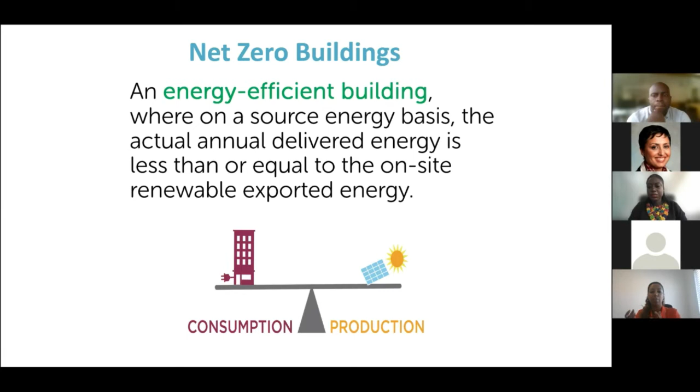So we talk about net zero, but what exactly is a net zero building? A net zero building is an energy efficient building where, on a source energy basis, the actual annual delivered energy is less than or equal to the on-site renewable exported energy. Basically, whatever you're consuming and whatever you're producing, it's a balance. But how do we go about achieving this?

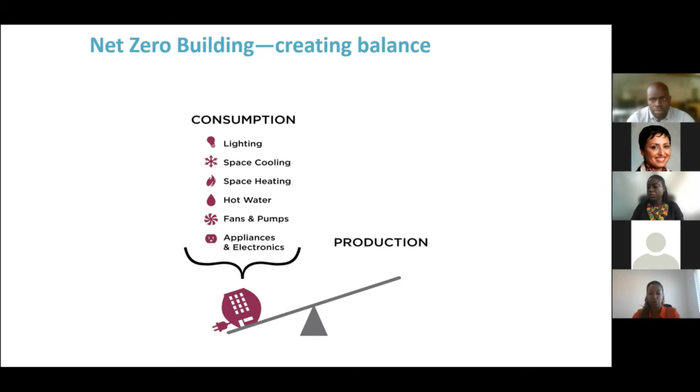Let's talk about consumption first. Any building, whether in the US, Ghana, Africa, or throughout the world, has lighting, cooling and heating needs, hot water, fans, pumps, different appliances, phone charging, computers - a bunch of appliances that go into our household. That's all part of our consumption. Then we need to balance what we're consuming by adding on any renewable energy to our production in terms of utility.

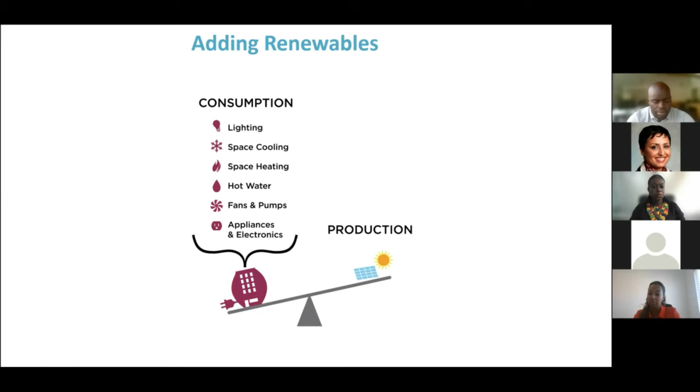So a building on a diet, think about our own bodies and a diet as well. That is what you're consuming and what you're producing is balanced. Keep in mind, this is on an annual basis. For example, your production could be higher at summertime and much lower in wintertime.

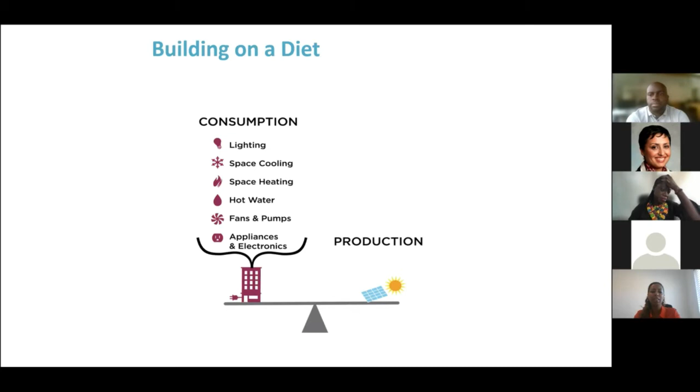To achieve this, the first thing you have to do is energy efficiency. You have to have an energy efficient building and energy efficient systems, consistent operation and maintenance, and then change in user behavior also comes into the consumption part of getting to zero. To achieve this, we have to have at least about 50 to 70% reduction from standard buildings that exist today, without the net zero concept behind it.

Secondly is when you apply on-site renewable energy. In most cases within the US, this has mostly been solar. This concept can be enlarged through a country or a region, but right now we're focusing on buildings, so it's whatever you're producing on your building in comparison to what you're consuming. That is the definition of what a net zero building is.

I mentioned earlier that my focus when I worked with the Department of Energy was specifically zero energy, and the US has a zero energy mission. That mission is to accelerate the development of zero energy commercial buildings, specifically the space I was working on, but we also have retail, office buildings, residential as well, and to make sure that as a federal government we are providing the technical assistance and the operations, construction, design, all of those to be able to deliver a zero energy building.

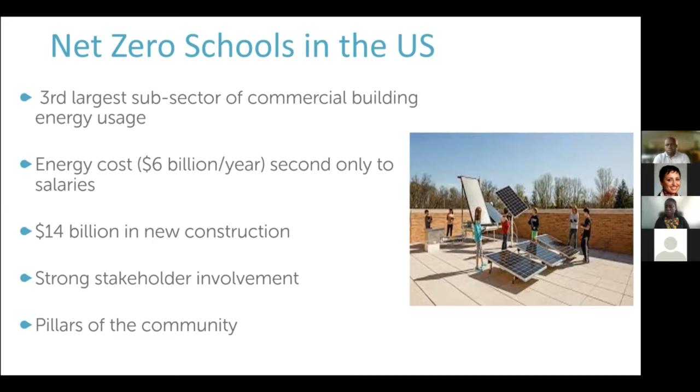This was about 8 or 9 years ago. So what were the challenges back then? Of course, these challenges still exist—you don't change the market in a few years. So we decided to first identify what our barriers are and then what the strategies are.

The first one is lack of reliable information on how much it costs to build these buildings, or lack of technical knowledge. Net zero investments are perceived to be too expensive. That's always been the case.

A school board, when they meet together to decide to build a new school, do they even know what net zero means? If you're not actively involved in the energy industry, these are not terms you're familiar with. So there's a lack of education in that space, and then a lack of integration between designers and school administrators. School administrators make decisions in a silo outside of these designers. Yes, designers might know about net zero, but there's still that lack of education, and we need to bridge the gap with school administrators.

So a few of the strategies we came up with: the first one is providing access to the feasibility study. The US, with the help of the National Renewable Energy Laboratory, NREL, did a feasibility study, and we found that cost to cost, you're able to build a net zero school building whether you live in the coldest part of the country or the warmest part. This highly technical study is available — anyone can Google it — but we are also placing it as a resource for our schools, along with technical design and strategies.

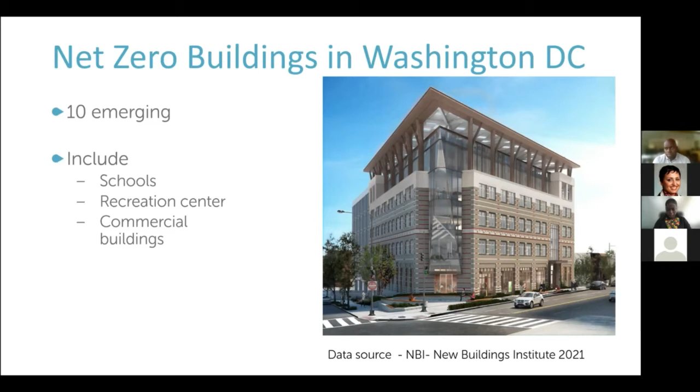So again, while big strides are being made to improve net zero buildings and increase their numbers, there are still a lot of challenges — including the fear that net zero buildings will be too expensive.

Again, this is always a concept, even though there are case studies where the cost has not been significantly higher. That is still a myth that's out there. Risk of new technologies, cost, time, underperformance.

There is this idea that maybe they're not giving us enough windows, or maybe too many windows, so now it's too hot in there. But no, these buildings are designed with health and safety of the occupants in mind, and in fact operate exceptionally better than standard buildings.

Risk that buildings do not perform as designed. Fear that occupants will be less satisfied. Again, folks thinking that they're not getting enough AC or enough heating just to be able to save energy.

That in fact is not the case, because there are technological advances that have been made so you're able to get enough of either your heating or cooling needs without having to consume as much energy. And workforce is a big deal—making sure our building operators know exactly how to operate them, and this needs to go hand in hand with the technology advancement.

So while those barriers exist in the US, there are even greater barriers for Africa. So now I'm bringing it back to buildings in Africa. The focus, to be quite frank, for Africa is power generation.

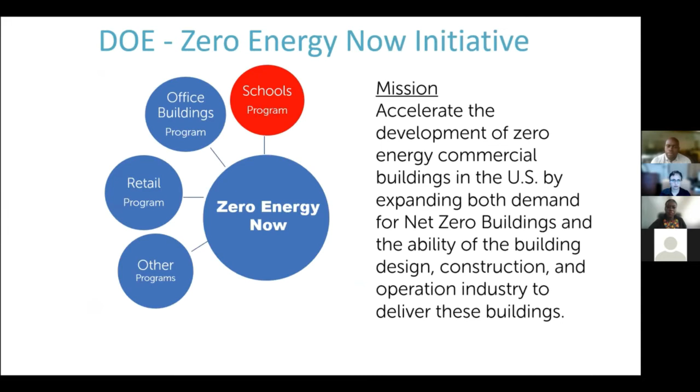Great, thank you for that, Salome. I think there was quite a striking stat there that you had of 50 to 70% reduction in energy. Is that something that is being achieved within that net zero program? Because I think what's important for us today is to understand what is being achieved.

Yeah, well, so if the targets are 50 to 70%, you basically have to reduce your energy use intensity, EUI, per square footage to make sure that you get to this figure, basically to the 50 to 70%.

Yeah, and I think that's something for all of us to keep in mind, because we're trying to figure out whether or not this is possible, and the efficiency-first approach where we have to reduce significantly - this is 50 to 70% reduction on a performance that was already probably a bit more efficient due to the energy code that is in there.

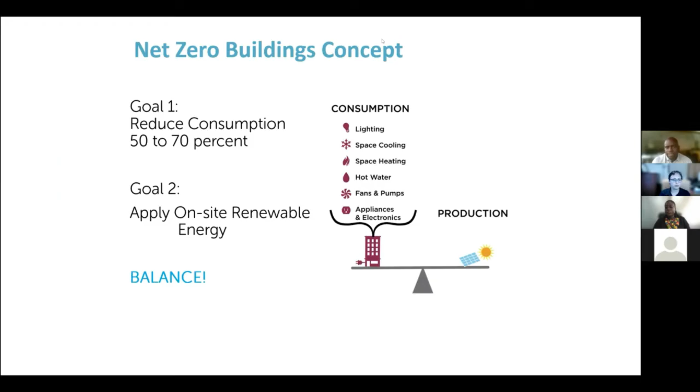I am setting up my slides here. Just give me one second. Cool.

Are you able to see my screen? Yes, great, yes we can see it.

Okay excellent, so thank you Salome for that interesting presentation. And let me put this out into the universe that it's Salome's dream to work on development in Africa, so in case anybody is listening to that. Thank you for the shout out. It's a shout out for Salome.

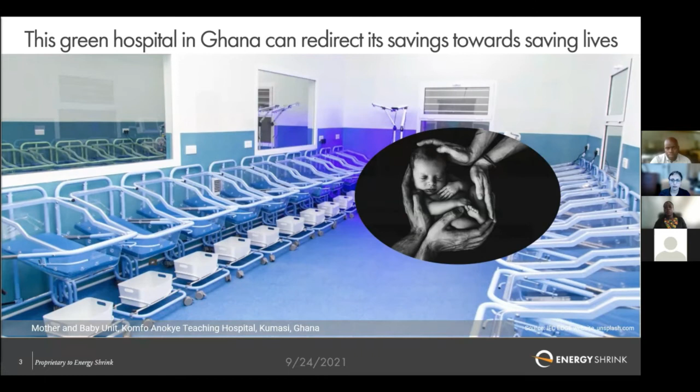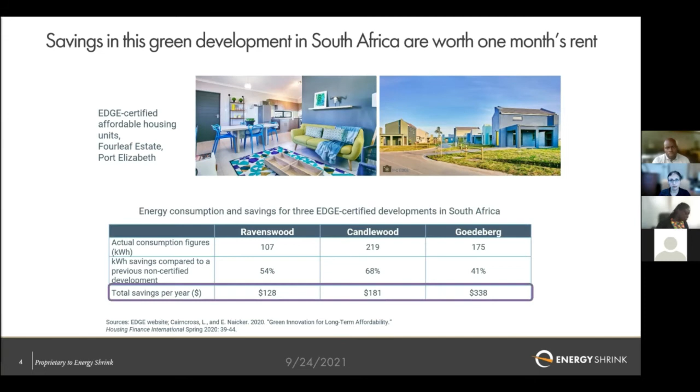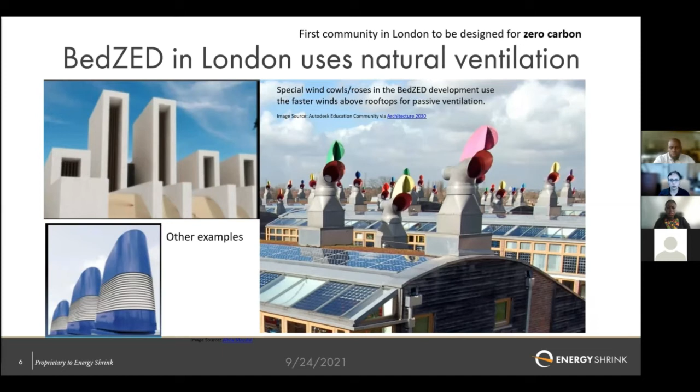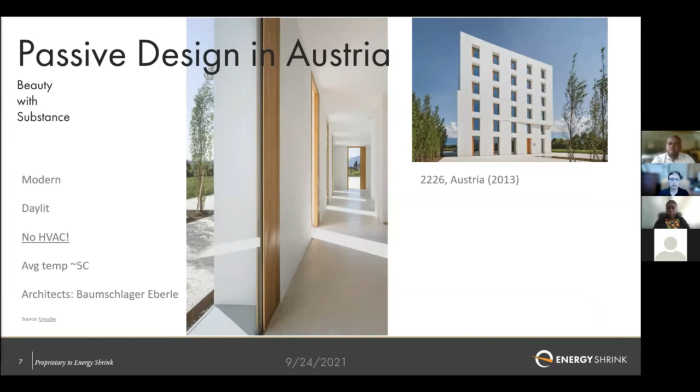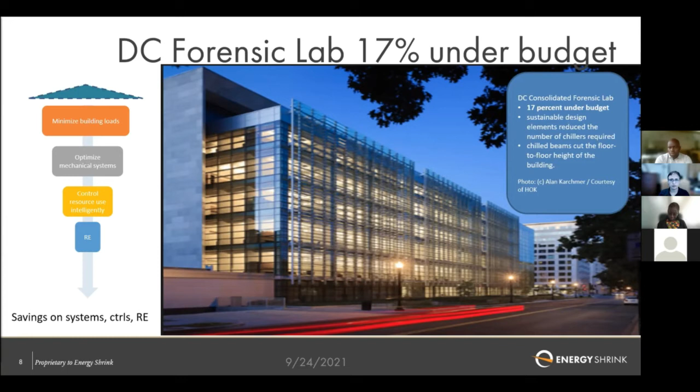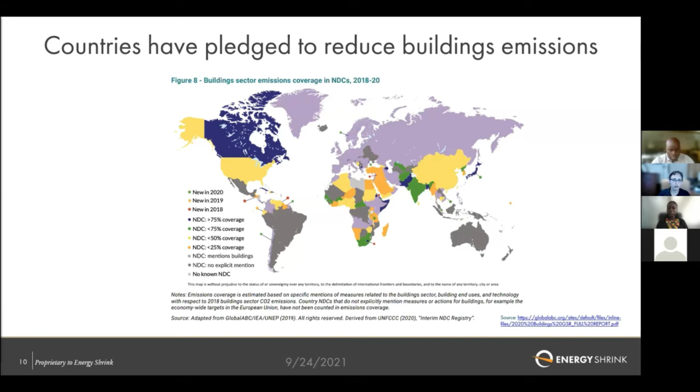Countries all across the world have pledged to reduce buildings emissions, and we have COP26 that is just coming up. Let's see what we pledge afresh in the coming days. But there is a lot happening that we must meet the requirements of.

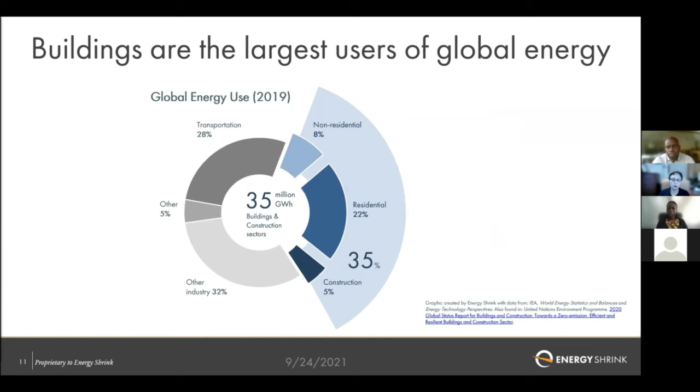Buildings are the largest users of global energy and the largest source of global emissions from fossil fuels. I'm sure a lot of you know this already, but it's worth remembering why what we are doing is so important.

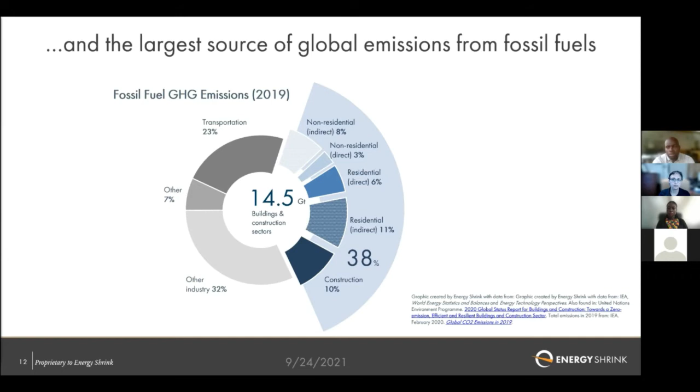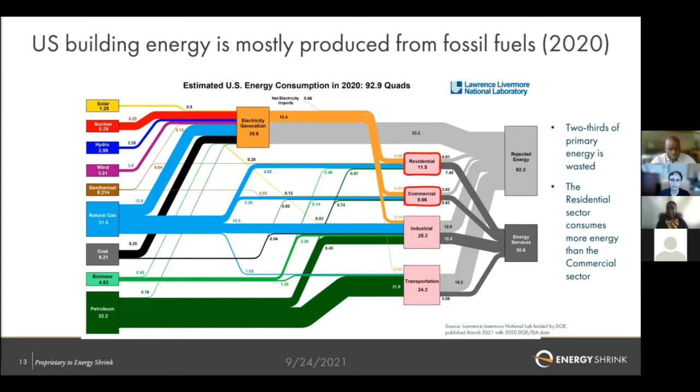US building energy is mostly produced from fossil fuels, and this is true almost everywhere in the world still. And we are still continuing to build coal plants, which is unconscionable, in this day and age when we are fighting climate change. In the US, what we have found is that GDP and energy use have been decoupled.

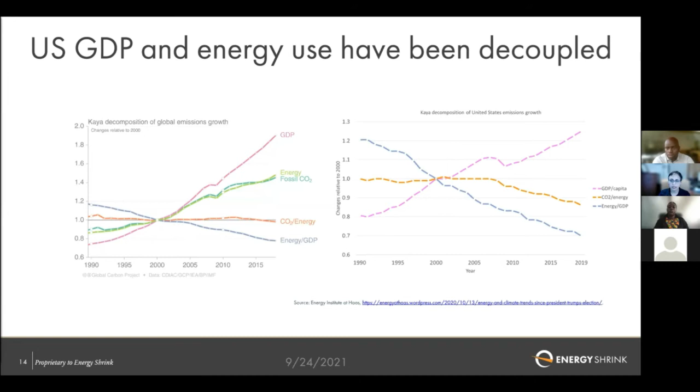This is true in almost all advanced economies. As the GDP is going up, the energy use is going down. The idea is that we can do more using less. Even in China, this is true today. So we must be mindful that energy efficiency can help and we can do more with less.

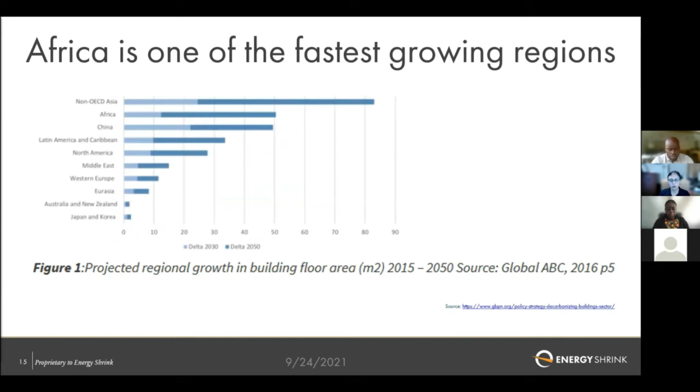Africa is one of the fastest growing regions. It's going to see a boom in its growth in the coming decades. So it becomes really important for new construction to be very mindful of the fact that the building sector has the most potential for reduction in emissions.

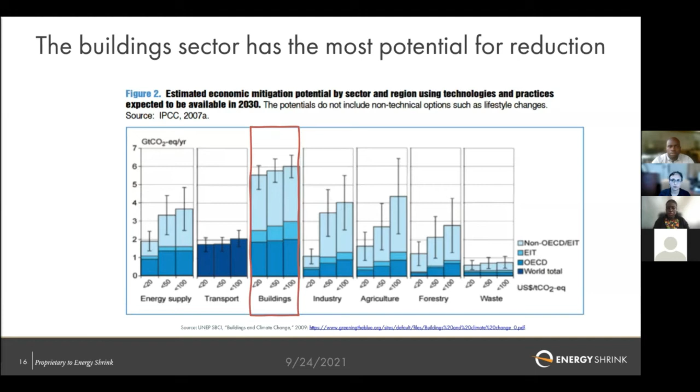Yes, it is true that transportation and industry also have a lot of emissions, but building sector is the sector where we have the technology today to get to net zero. We have the technology today to reduce our emissions, and we can do this across a range of GHG, that is greenhouse gas abatement actions.

I think we lost Smita a little bit there. Are you back, Smita? I am here. Are you able to see my screen? No, we can't see it anymore. Yeah, it kind of kicked me out. Okay, let me try again. Do you see it? Yep. Okay, sorry about that. I don't know what happened.

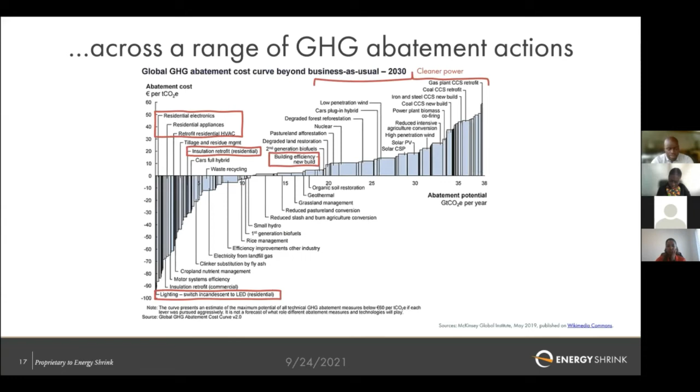Anyway, so we were talking about the cost abatement curve. The point of this study was to show that you can do a lot in buildings at negative cost because you're actually saving money by doing them. So moving on to the next slide.

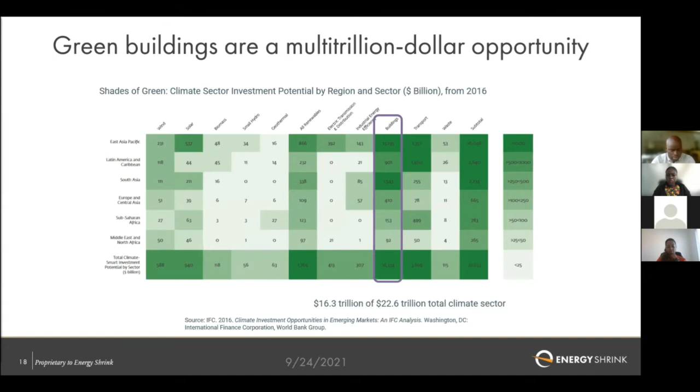Green buildings are also a multi-trillion-dollar opportunity. This is from an investment point of view, a study put out by IFC that shows that, IFC is an impact investor and it is focused on developing economies. It has shown that these can be really profitable investments.

Embodied emissions are another area that are becoming increasingly important. As your building operations costs are going down, embodied emissions are becoming important. That is the emissions that come from the materials that go into the buildings. So as you're thinking about building operations, also think about what you're using to build your buildings.

I'd really like to stress that in the last 50 years, we've kind of lost sight of where we are with our buildings. Before the invention of central air conditioning, central heating and cooling, all over the world, we used to have local building technologies that would help us live comfortably in the local climate. Now that we have air conditioning, we are starting to just throw in an air conditioning system and put in a glass box. And it makes zero sense. Really, it makes zero sense.

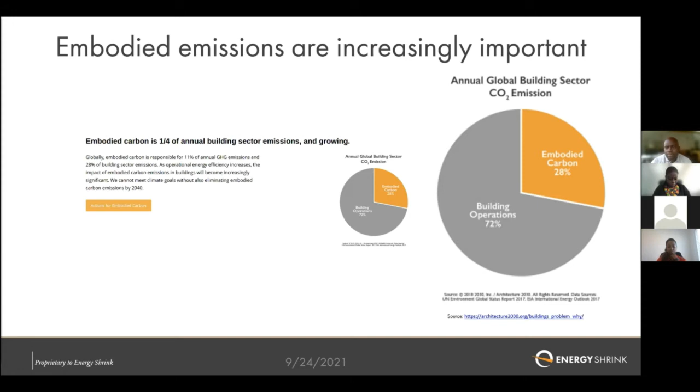So we need to learn from our history and try to think about what makes sense in our country, wherever we are located, so that we can reduce our dependence on heating and cooling systems that are fired by fossil fuels. This is another point I'd really like to share.

However, these 3 buildings are different from each other. The first building consumes 150 kW, that's its demand on site, of which 100 is supplied from the grid and 50 is coming from the solar panels. This building has a giant appetite.

Next to that is a building that has been designed much better. It has less glass, more shading, and half the appetite. Therefore it draws half the power from the grid, and it needs half a solar panel system, which is also halved.

So we have to remember that even though we may be balancing what we produce on the grid and on the solar panels, what is being produced on the grid is already emitting emissions into the atmosphere. So whatever you produce on your solar panels, even though it may be net zero because it's canceling out what you pull from the grid, the emissions from the grid are still going into the air, and once they're in the air, they stay there for hundreds of years. So if you want to really clean up the atmosphere, we have to stop pulling so much from the grid.

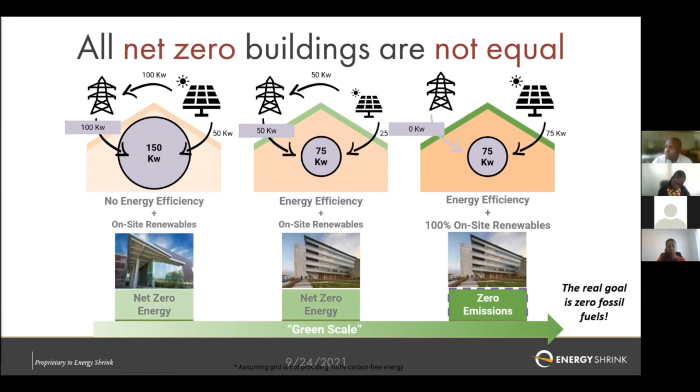This is a little bit on the net zero building process, and Alexi from NBI will probably talk more about it, so I won't spend a lot of time on this, but this image is actually from NBI, who are one of the leaders in how to build for net zero. I'll just say very quickly that the idea is to first lower your energy use on site. That's step number one.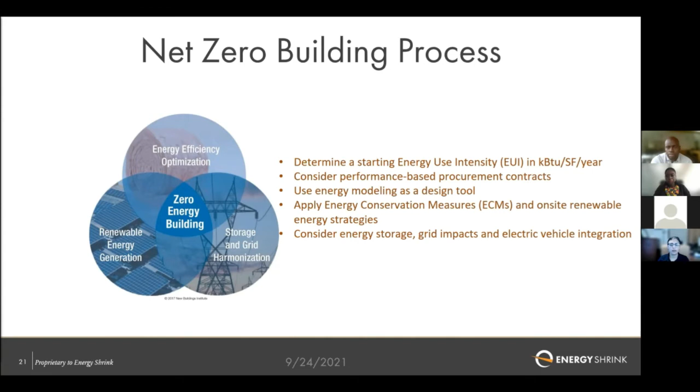Then you think about how you're going to do that, whether through performance-based contracts or using energy modeling, applying energy conservation measures. You just want to keep reducing your energy use before you think about going to your solar panels and storage. So what you see here is what we at Energy Shrink call the pare down framework. Imagine it like taking a piece of wood and whittling it down.

So we say you start by minimizing your building loads. That is, you use passive design techniques to minimize as much as possible the loads that the building puts on your building systems. Once you have these smaller loads going to the building systems, you have a smaller building system to invest in, and you have to make that system as efficient as possible, which means you right size it.

You don't use the typical HVAC mechanical engineer thinking of making it 2 or 3 times as a safety factor, because that makes your mechanical system cycle a lot. Of course you're paying more out of pocket to begin with, but all the cycling, wear and tear actually reduces the life of your mechanical system. So you want to right size it.

You want to utilize ground heat. You want to maximize your system efficiency on lighting and equipment. Now with all of that, you use your advanced controls. And with this whittled down building that has a much smaller need, you put in a smaller renewable energy system, and support it with storage and a clean grid if possible, to have a much smaller footprint for your building.

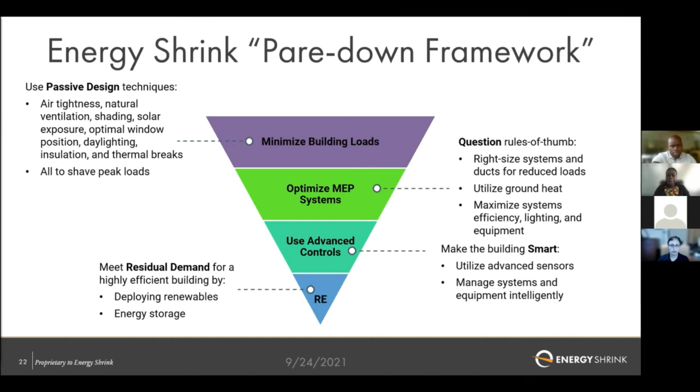Now this is an impact analysis we did for a sample building in DC. In blue you see the baseline building, and in gray you see the integrated case, which uses a bunch of efficiency measures. I'll highlight the bottom line: we've reduced, and this is only a model of course, but the models are not that far from reality if you do them well. Here the EUI shows 80% energy savings you can get on your building even before you've started thinking about your solar panels.

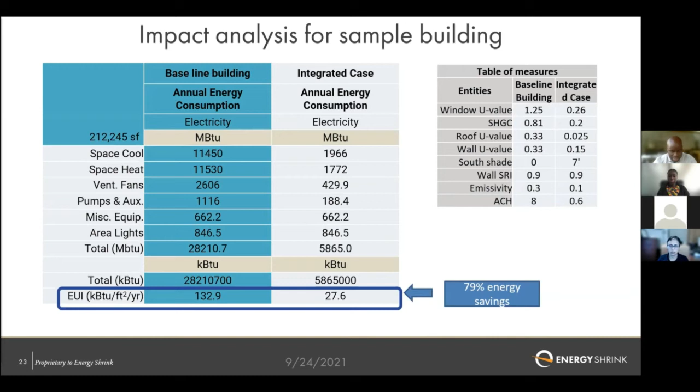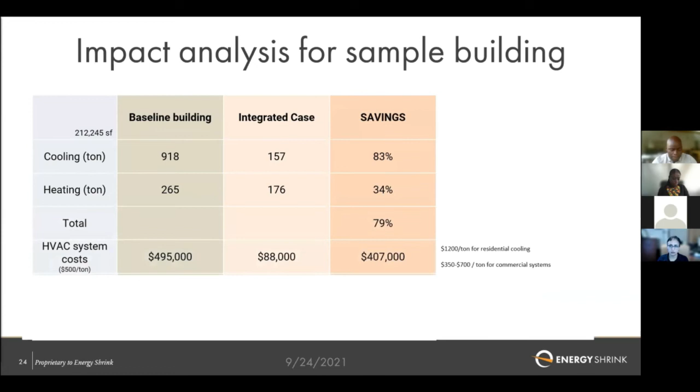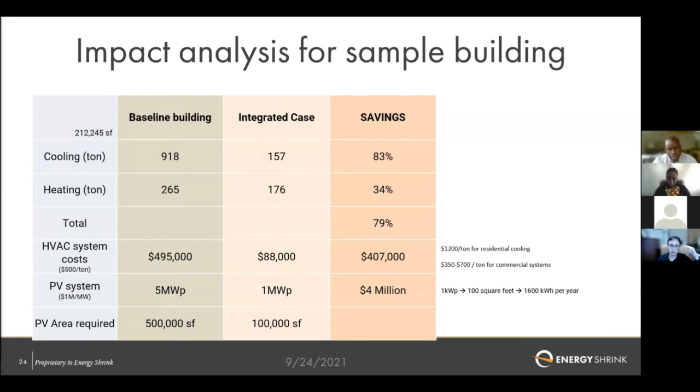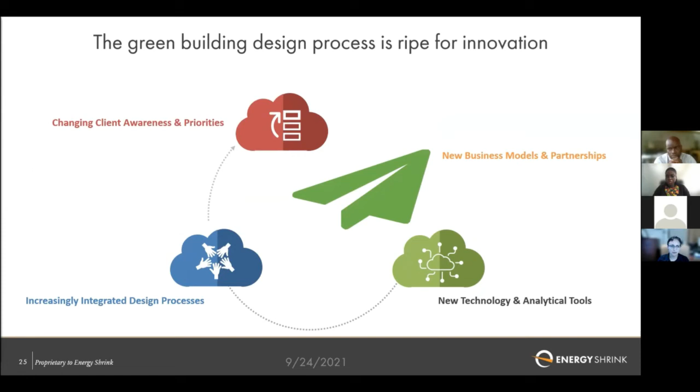What we are showing with this building is that your HVAC system costs are going to come down. You're going to save hundreds of thousands of dollars on HVAC and millions on your PV system. So essentially, the money you save on HVAC and PV, when you think about it in an integrated fashion, you can put into your building, your thermal comfort, your insulation, and save money that way. In closing, I'd like to say the green building design process is ripe for innovation, and I welcome your questions.

Smita, I think there are some parallels with Salome's presentation, which is you're reducing 50 to 70% energy, and a lot of the examples you talked about had no HVAC at all, which is quite a big mind shift for people to think that you have to design a building with no HVAC. And one of the other issues you raised of glass boxes - with net zero, you almost have to be able to look at a building and say you'll never achieve it. Do you have any experience with that aspect, with clients and project teams, where you actually have to drop 60% of the glass on a building?

Anshilu, I'll keep my answer short because I'm aware Pauline and Alexi haven't spoken yet. But back in 2007, we were asked by EPA this very question: is it even possible to get to net zero? Like Salome mentioned, we found that if we took a large office building - not a school, which is actually easier to work with - across all climate zones in the US, we were able to show that for new construction, you can get to net zero in any climate, even for a large office building. We see this around me, near DC - many schools, typically where the money is, are able to see the results. We have schools coming in at under 20 kBtus per square foot, multiple schools, and then they have solar systems which make them net zero. So yes, it is very possible, and NBI has a great database on many buildings that have achieved net zero.

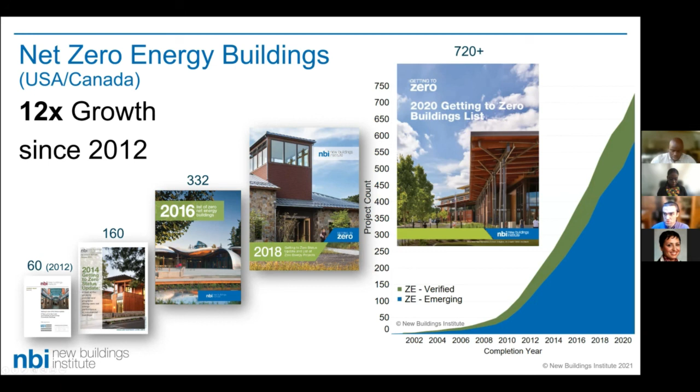Over the about 10 years since we started tracking this industry, we've seen about a 12-fold increase in the count of buildings across North America that are either achieving zero energy performance, producing as much energy as they consume over a year, or emerging to that level. This chart shows the blue buildings are trying to get there. Maybe I personally haven't seen their data, they may have made it to zero but I don't know that, or they're still striving for that goal. The green ones show projects we know really did get there.

We've heard from a couple of folks already today that net zero energy is quite critical, and we at NBI consider these to be the 5 foundations of getting to a net zero carbon or carbon neutral building, since as a world we're not terribly concerned about running out of energy. There's a lot of oil, coal, gas, as well as renewable energy potential. There's plenty of energy in the world. The problem is what happens if we use all that energy - that's the cost, the environmental implications of consuming, producing, and delivering all that energy.

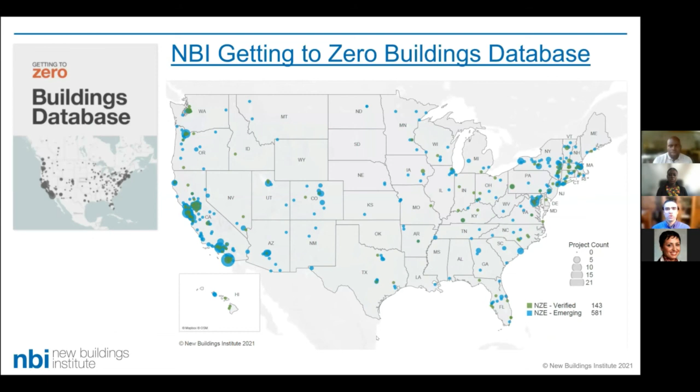So that database, all those dots on the map - I'll scroll back up to this. What we did here is we took all of these buildings, for those we actually know the energy consumption and production, and put all that data into one set. This is the energy use intensity, which I've converted to metric units, of all the net zero buildings for which we do know the data across North America, commercial and multifamily. And what this shows us is...

Basically they're taking an efficiency-first approach. The median energy use intensity for verified net zero buildings is about 60 kilowatt hours per square meter per year, and for the emerging ones it's slightly higher. Both of those are really good targets.

In kBTU per square foot per year, in these imperial units we're stuck with here in the US, it's about 20 to 22 kBTU per square foot per year. For reference, a code level building using the most up-to-date, highly efficient energy code, the 2021 International Energy Conservation Code, it's called international but it's really mostly here in the US, comes in at about 145 or so kilowatt hours per square meter per year. So these buildings are using less than half of the baseline of even a very modern, stringent, high performance code.

And you saw in Smita's presentation that there are real cost implications of doing that. If you invest a bit more in the envelope and in passive systems, then you get savings. You don't have to invest in large cooling systems or other mechanical systems. And if you're trying to get to zero, you have vast savings on PV. You don't need nearly as much renewable energy.

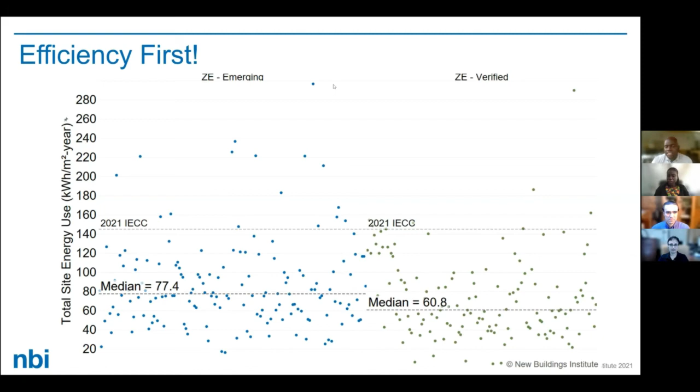So I'll just take it in the order I'm looking at people here. Pauline, Salome, Alexi, then Smita. Yes, no, maybe. Okay, so it's a fad depending on the context. If it's an African context where, as Alexi says, the cost is relative, it's not much, but in our context it's a different question altogether. So depending on the context, it could be a fad. Will it be a no? Okay, there's a yes. I think we'll leave everybody's answers to the panel there on the side. It would be great if everybody could rename themselves, because it looks like David Opoku is the only person giving us answers.